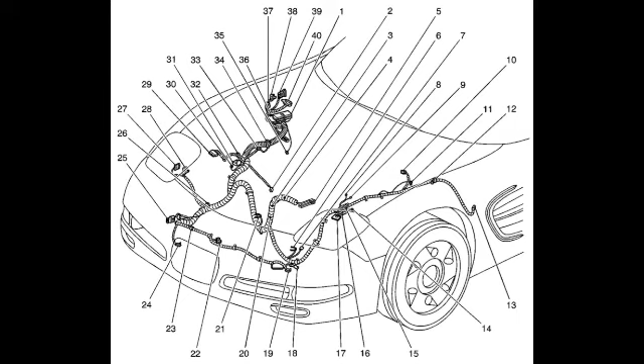Now, some of you might or might not be aware of the internal components underneath the hood of a car, but if you were to open the hood and actually look in a car, it's actually a very complex machine. We'll be getting to machines soon enough, but appreciate the perspective of fluid pressure underneath the hood of a car. So let's look at an animation of how brakes work, followed by how an engine works.

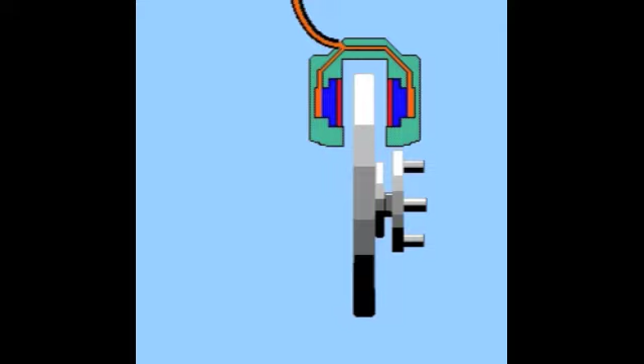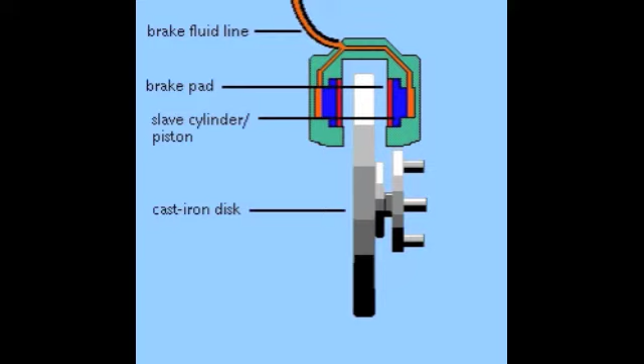Of the two common braking systems used in automobiles, disc brakes and drum brakes, the disc system is the more reliable. Disc brakes work on the principle of applying friction to a rotating disc. The brake has three major elements: a cast iron disc that is attached to the wheel, brake pads on either side which apply friction, and a hydraulic piston that pushes each pad against the disc. When the brake pedal is stepped on, hydraulic fluid is forced from the master cylinder to the slave cylinders at each wheel. A hydraulic system is used because it delivers pressure equally to all wheels. The pressurized fluid pushes the slave pistons, which in turn push the brake pads against the rotating disc. The greater the pressure, the harder the pads rub, the faster the braking.

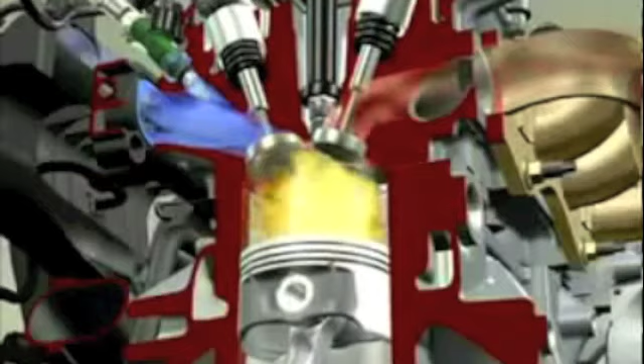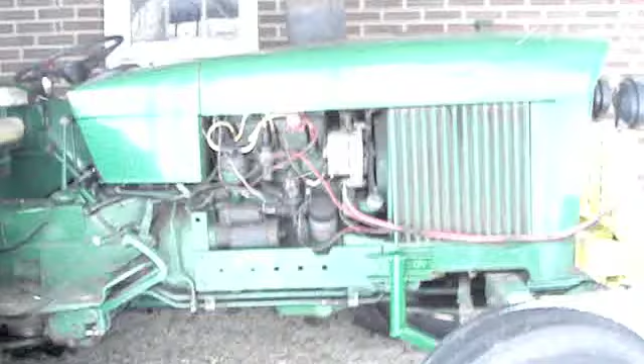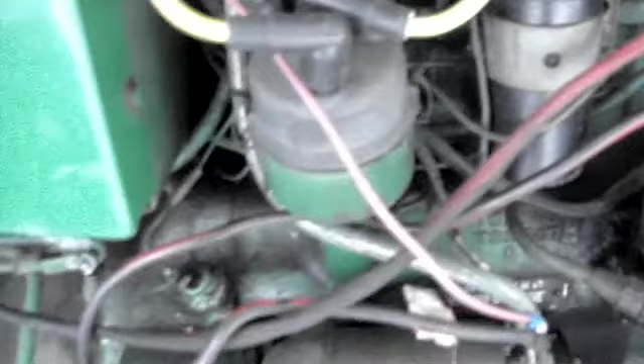Now, to best show you pressure, the best way I thought I could show you is on an oversized garden tractor. Here we have a big John Deere tractor. Let's take a look at some of the parts that we're going to be using. Here we have all kinds of pressure line distribution systems and electrical lines, so to speak. In all these pieces, we have some type of pressure distribution where fluids are involved. I won't get into the complicated physics of the tractor, but I will start it up and I will show you some of the interesting things.

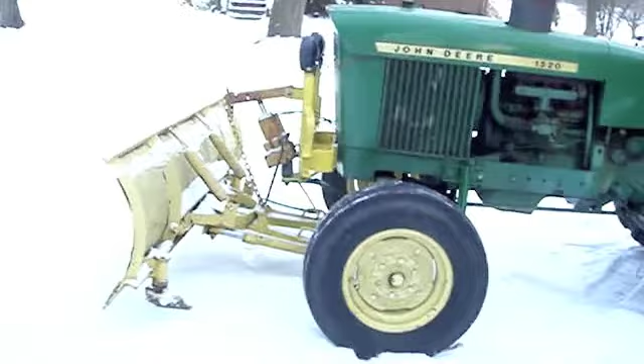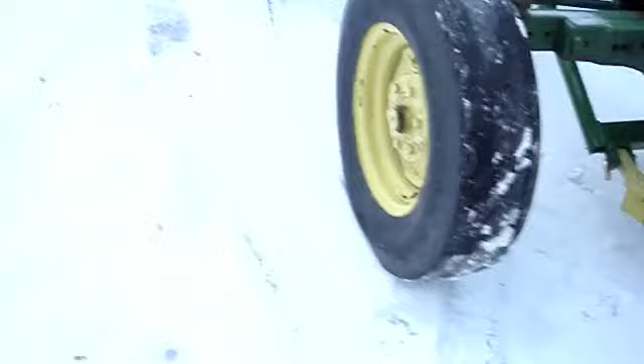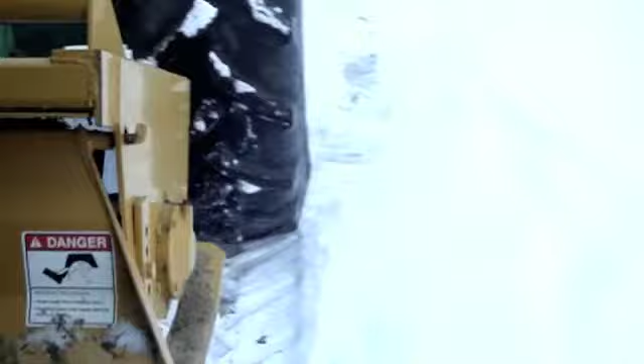Okay, so here's our John Deere tractor powered on. Notice the modifications that we have on this bugger right here. We have a custom snowplow, a very articulate exhaust. We also have a summer plow, which hasn't been removed for the winter, but that's fine because I'd like to show you how some of the stuff works. The take-home lesson is, we have a gear-driven shaft down here. That's going to rotate to turn this plow down here. Now there is some physics in the engine that allows that rotation to occur due to fluid pressure.

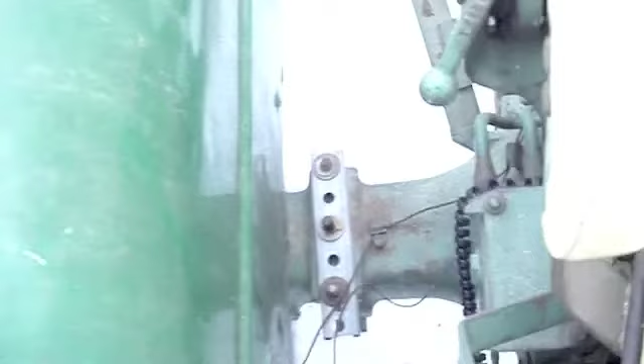Here's the control lever over here. Let me just get up on the tractor to be safe. But as I lower the lever, or I raise it up, the hydraulic hoist is raised and lowered. So here's the lever, it goes down. Notice that it comes crashing down, which is bad. You should never do that. But anyway, gently raise the lever and gently lower the lever.

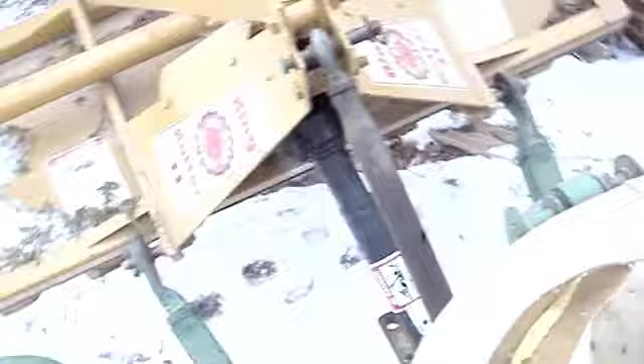Alright. Now Mr. Tractor's about to stall because of the choke. Let's choke him a little bit. Also fluid pressure. And we stalled him just in the nick of time. Okay, so he's started back up again.

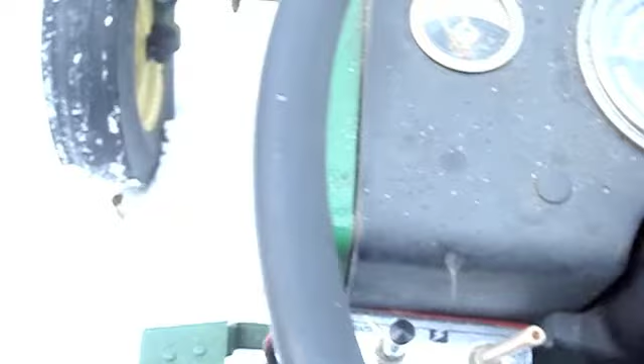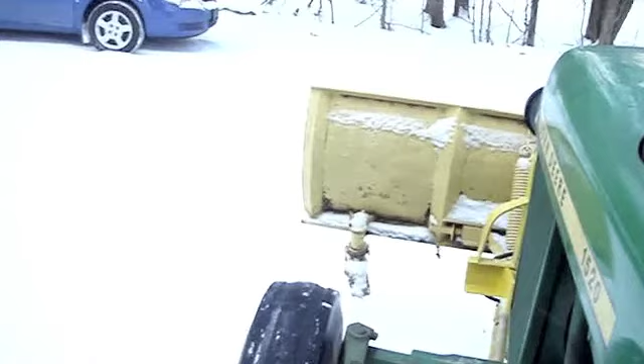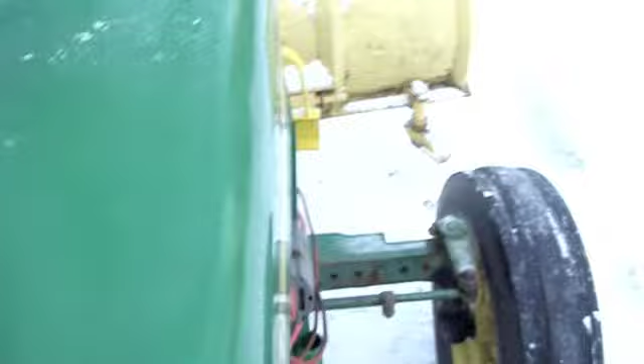So here we have our snowplow. We have an electric controlled hoist, which uses hydraulic pressure too. So we're going to raise and lower the plow using that side, and we're going to angle left and right using this little control arm. Alright, so we're going to go up. There's the maximum. We're going to angle left. And then we're going to angle right. Now this rotation happens because of hydraulics, which uses fluid pressure.

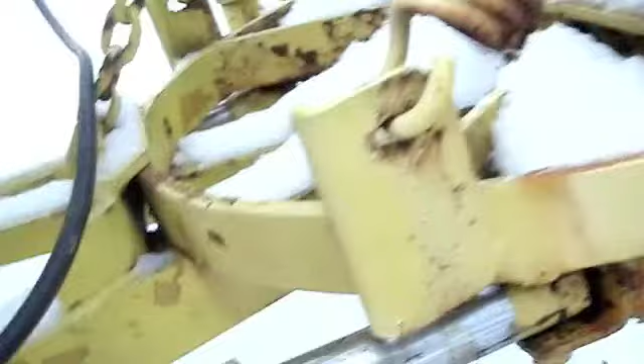Let me hop down from here and not hurt myself in the process. Okay. Notice these little arms. These are hydraulic pumps. Fluid pistons inside here. Has a pressure from this hose. Now, we said that fluids are virtually incompressible, correct? So, whenever the engine or whatever forcing mechanism that's used, an electric motor for example, is used to force pressure through these pistons, these arms right here are forced full of fluid or whatever forcing mechanism that it uses, and this arm is propelled forward in the direction that you control it.

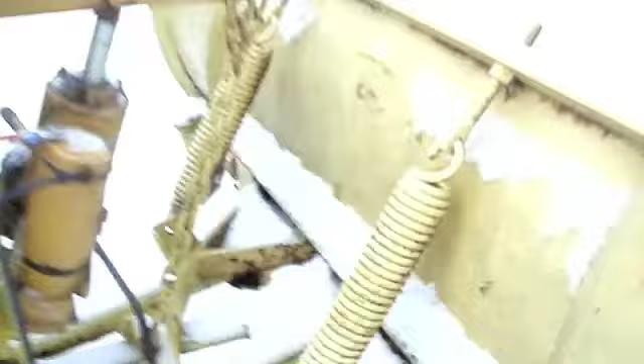Interested in some entertainment? Okay. See, anything else I want to say about this? Well, maybe take note of the rotating mechanism in here. That's about it. Kind of hard to see, and I'll see if I can find some diagrams to explain this.

Alright. I know everybody's dying to see Mr. McCullum on a tractor. Now as we engage the clutch, and raise the platform,